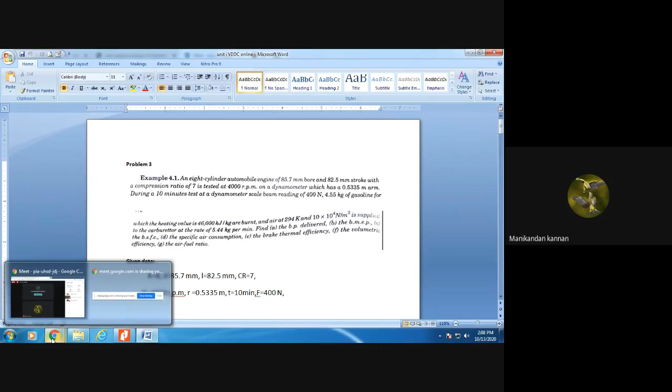So today, in the first unit, we are going to see the third problem. Yesterday we have seen two problems, today we are going to see the third. I will be reading out the question, then explaining you the given data, then you have to write and solve. Are you ready, Manikandan?

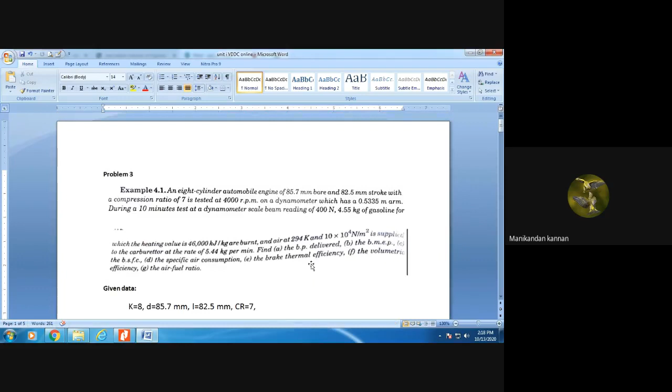Now all the data have been given. They are asking what? Brake power. So you have to find the brake power. The brake power formula, I taught last class: 2 pi NT by 60,000. 60,000 is for kilowatt.

So now what I'm going to do is, instead of N, I'm going to type the value. N is nothing but 4000 rpm. Engine torque - how to find the torque?

Another student joined. So N I am putting 4000.

For finding out the torque, we need force into radius. So what I am doing is, force is 400 multiplied by r. R is 0.5335. So you have to find the answer for this.

If someone is working, they may give the answer. Since you are traveling, you will not be able to do, I think. But next class, you give the answer. That is, without answer, we will see. Next class, I will be asking the answer from you, you have to tell.

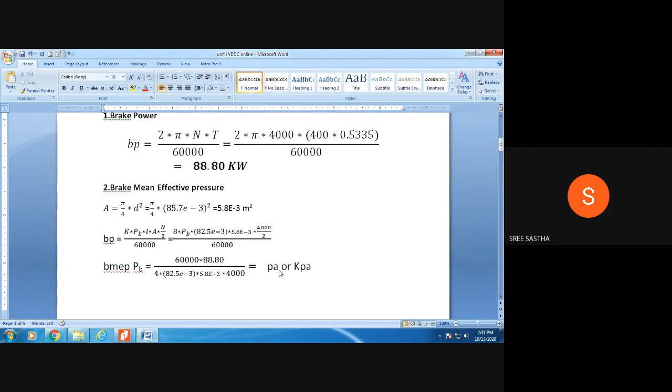Next is brake specific fuel consumption. BSFC means you first have to get the formula, and to get the formula you have to think about what it represents. As I told you last class, BSFC means how much fuel I am going to consume for the required power. B means I have to use brake power in the denominator. If it is I, I will be using indicated power in the denominator.

Here, my unit for WF will be in kilogram per minute. But what data am I having? He has given 10 minutes for conducting a test on the dynamometer. For 10 minutes, I am consuming 4.55 kg of fuel. So for 1 minute, how much fuel am I consuming? For 10 minutes it is 4.55, so for 1 minute divide this fuel quantity by 10. This gives 0.455 kg.

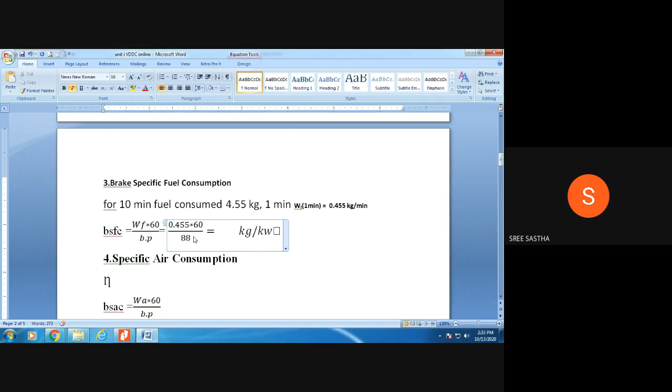I will be substituting 0.455 into 60, with brake power as 88. Whatever value you substitute, then you calculate. As I told yesterday, the value will come out in kilogram per kilowatt hour. You might have seen this last class — brake specific fuel consumption is measured in kilogram per kilowatt hour.

Why is H not coming? It's showing as a box. So here, brake power is in kilowatt, and my specific fuel consumption is in kilogram per minute. In order to convert that kilogram per minute, I multiply by 60 so it becomes kilogram per hour. Kilogram per hour divided by kilojoule per second gives a unit of kilogram per kilowatt hour.

Let me clarify here — yesterday this was unit one, and I mentioned kilogram per kilowatt hour. I have to use this 'brake' term because I'm using brake power now, so that the correct wording is given. So you have to use B — B stands for brake power. Now you find out this answer.

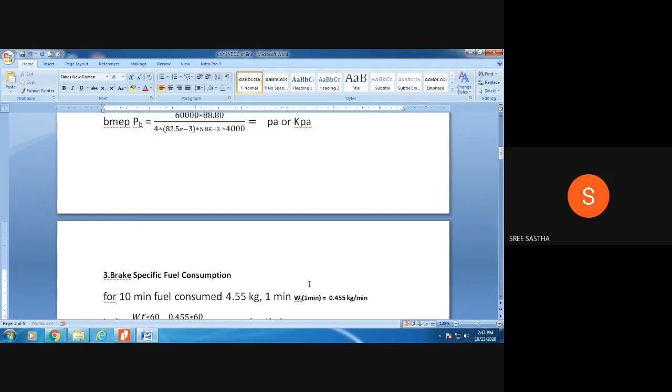So first parameter, brake power, we have calculated. Second, brake mean effective pressure, we have done. Third, brake specific fuel consumption, calculated using this formula: WF into 60 divided by BP, and WA into 60 divided by BP. So you have to work this out and give the answer.

Brake thermal efficiency — the fifth parameter is brake thermal efficiency. As I already told you, thermal efficiency always relates to how much fuel I am going to consume — that is, how much chemical energy I have, and for that chemical energy, how much energy I am producing. So brake thermal efficiency uses in the denominator how much fuel I consume and what the heating value is, then brake power is used. The 60 is there because I will be substituting the weight of fuel in kilogram per minute, so the units tally. Brake power you substitute as 88 kilowatt.

If its brake power is in kilowatt, calorific value should be in kilojoule. Whenever you have any doubt in the unit, substitute all the units, cancel them, and find at last what unit is coming. Here, kilowatt, kilojoule per kilogram. This kilogram and weight of the fuel in kilogram will get cancelled. Denominator has minute, I converted into second, so kilojoule per second becomes kilowatt. So numerator also kilowatt, denominator also kilowatt, so it will be cancelled and you'll be getting brake thermal efficiency.

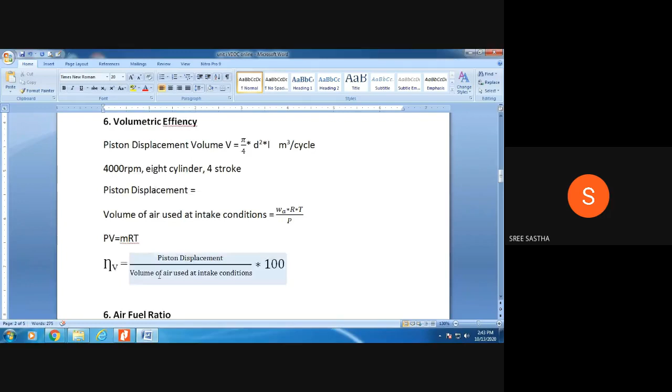Look directly at the formula for volumetric efficiency. Volumetric efficiency formula is piston displacement divided by volume of air used at intake condition, multiplied by 100. This is volumetric efficiency. So in order to find volumetric efficiency, you have to find piston displacement and volume of air used at intake condition.

Piston displacement volume - in IC engine you might have studied swept volume, Vs, piston displacement volume. I can use Vs or swept volume. Formula is pi by 4 d squared into L. D stands for bore diameter, L stands for stroke. So we will be getting this value.

So what you are going to do is, it is not just piston displacement, it is piston displacement volume. For piston displacement, I have to multiply this volume by how many cylinders, what stroke, and what is the speed. Then only you will be getting piston displacement, that is meter cube per minute you will get. I will explain how you are getting this.

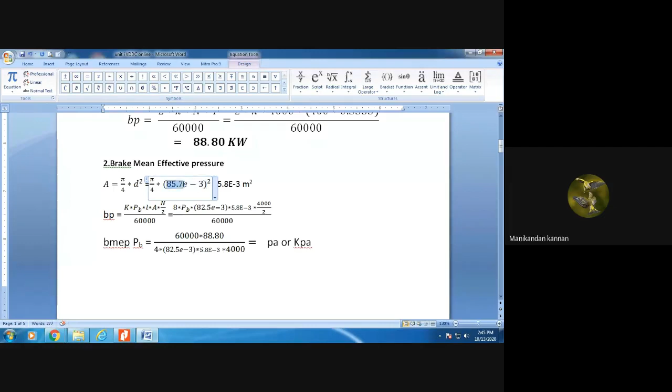The bore diameter is 85.7. Bore diameter 85 point something. So what I am doing here, the formula I have taken from the piston volume, you find out separately. Now it comes as 85.7 into 10 power minus 3, whole square, using the pi by 4 d square area formula.

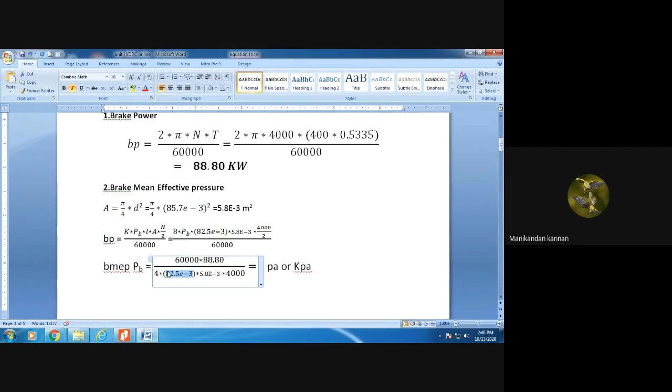Then multiply by L, you will get the volume, piston displacement volume. L is nothing but stroke. How much stroke? 82.5, so it is in mm, convert into meter. So pi by 4, 85.7 into 10 power minus 3 whole square, into 82.5 into 10 power minus 3. Don't get confused - you don't put square for stroke, you have to put square only for bore. So this one is piston displacement volume.

Now from this, how can I find piston displacement per minute? What I have to do is multiply this by speed, 4000 rpm, then multiply by how many cylinders, 8. Since it is a 4 stroke, divide by 2. Let me check.

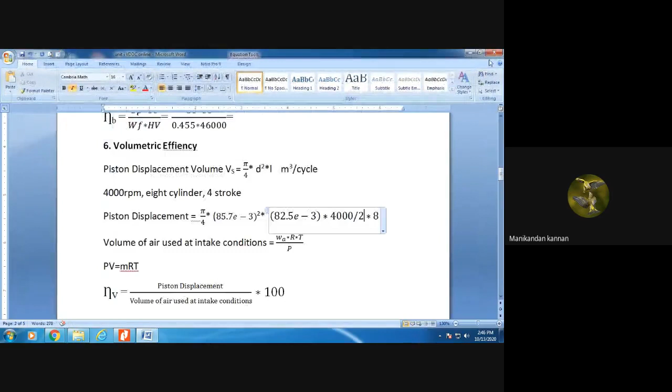Now I am going to give the values also, so that you can note down, because it has already been solved in the book. So you have to work it out without referring to the book or notes, and give the answer.

Okay, let us compare your answer. I'll write it from the first. So for brake power, see, force multiplied by radius: 400 into 0.5335. The answer it is giving is 89.

Later you can check. If it is not coming, write whatever answer you are getting. 89.34 kilo, or 88.80, whatever I found may be different, later you can check.

Now see, indicator pressure, that is brake mean effective pressure. I should not say indicator pressure, because I'm using brake power, I should say brake mean effective pressure. They are calculating the area separately. You should not get confused with why 10 power 6 is here, 10 power minus 3 is there - 10 power minus 6 coming to the denominator gives 10 power 6. So no need to see the problem-solving methodology in the book. This one is very simple and you will not make any mistake.

So brake mean effective pressure is given in kilopascal. Let me copy the value: 704 kilopascal. This is my second answer. First answer is brake power, second answer is brake mean effective pressure.

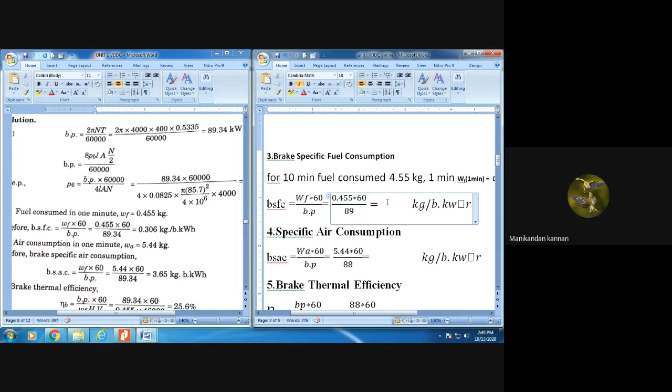Already you told the area. Later go home and check whether your brake mean effective pressure is approximately close to this area value, 700 something, 700 to 710, okay.

Sometimes the exact answer of the book will not come. So now see brake specific fuel consumption - same formula. It is coming around 0.306. I am not working it down fully; you have to work it out and use a calculator. I can't use a calculator because in the regular class itself we write the formula and tell you how to substitute - you have to calculate and give the answer.

So now I will share this file. What you have to do is work it out and check whether the answer is coming closer to this.

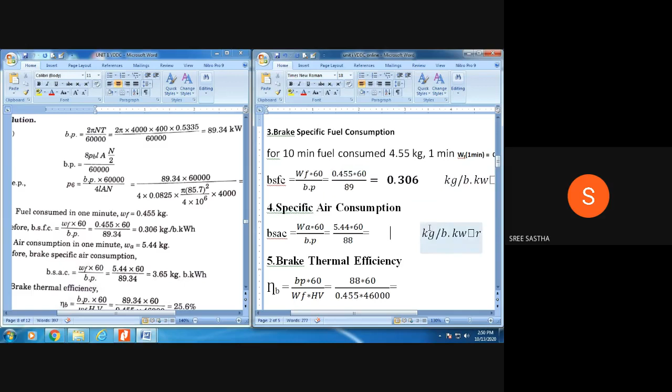Now see brake specific air consumption, same formula, but WA is directly given per minute - you can see here. WA is directly given per minute, so no need of any conversion. So it is coming to 3.65. This is the fourth answer, the fourth value he has asked.

Since no one is working it out, I am taking the answer from the book. Last class, Elaverson told the answer - 25 point 6, 0.256, okay.

So now see volumetric efficiency.

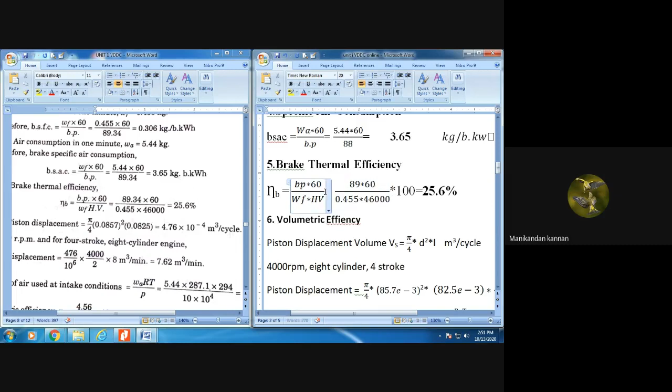It is understood as efficiency. By putting percentage, I have to multiply by 100, but I have to show it - I can't neglect it. Okay, good.

So now you have to find out the piston displacement volume, that is pi by 4 d squared L. It is coming in meter cube per cycle. I am explaining how much it is coming - 4.76.

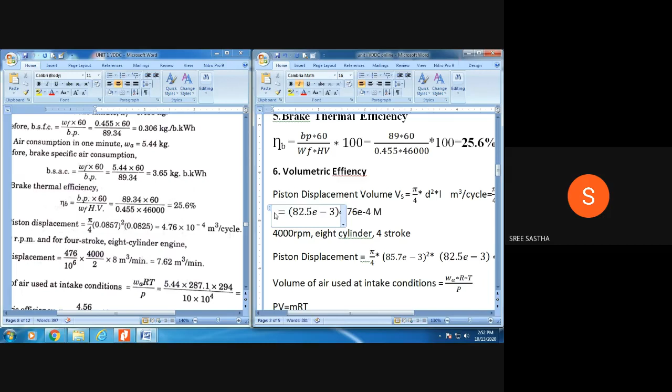Okay, copied. No. Hmm. So see,

This one L, sir, 4.75 into 10 to the power minus 4, sir. Pi by 4 d squared into L. Okay, this answer will not come. Whereas this one will be equal to... volume answer will be here equal to.

4.75 into 10 to the power minus 4. Okay, let me present it well. We will take this in the next line. Okay, this will be looking good.

D, I am putting 85.7, 10 power minus 3, multiplied by L. L is multiplied with 82.5 into 10 to the power minus 3. That you should not forget, okay?

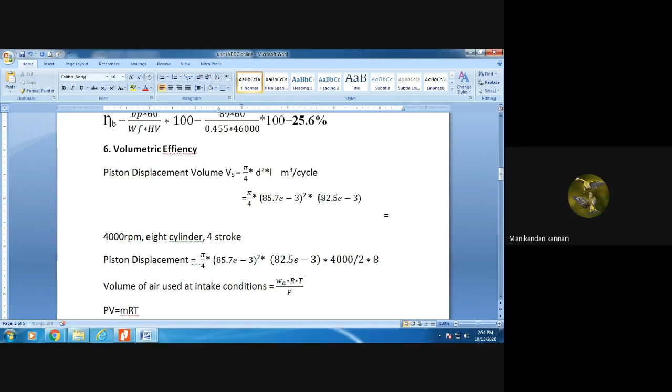Pi by 4 d squared into L. Square will come for bore only. So pi by 4, 85.7 into 10 power minus 3 square, multiplied by length. Length is nothing but a stroke, 82.5 into 10 power minus 3. The power minus 3 is because converting into meter. The unit will be meter cube per cycle.

So the answer I am getting is 4.75 into 10 to the power minus 4. Good.

Now I will explain this value. D unit is meter square, because you have converted mm into meter. L unit is meter, so meter square into meter gives meter cube. This is per cycle, not related to time.

For one cycle, my piston displacement volume is this much. Now I am going to find, for the entire operation of my engine, what is my piston displacement. So this is the formula: I have to multiply with the number of cylinders and stroke, four stroke.

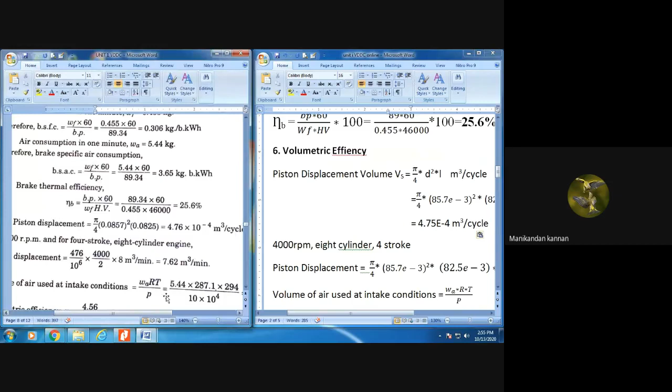No, I'm multiplying. See, so now I will simplify this. Instead of writing this much value, I will write directly my piston displacement. Now I think it will be comfortable for you to see.

See the formula. I have to multiply the piston displacement volume into number of cylinders, that is 8, and into 4 stroke. In order to avoid confusion, he is writing 10 power 6 in the denominator. If I am putting e power minus 4, I have to put a bracket, otherwise I will think it is 4.75 e minus 4. Here with the bracket, it is understood it is 10 power minus 4.

So it is the value for piston displacement, multiplied by number of cylinders, that is 8, and it is a 4 stroke engine. I am assuming it is a 4 stroke engine. So my n will be 4000 by 2.

What is the meaning of this? For 4 stroke, we are finding for a cycle. This one is for a cycle, and since it is a 4 stroke, we have to divide the speed by 2. For 4 stroke, number of power strokes, you have to find n by 2.

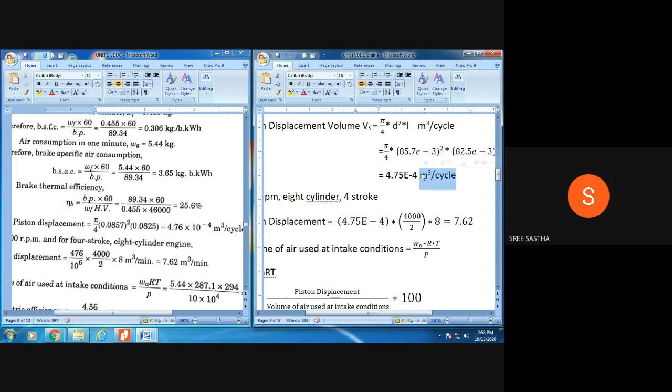So what I am going to do is this unit will be meter cube per minute. Now you no need to see this, just for seeing the answer only I have taken it. Unit should be always in small letters. Since it is equation, piston displacement is 7.62 meter cube per minute.

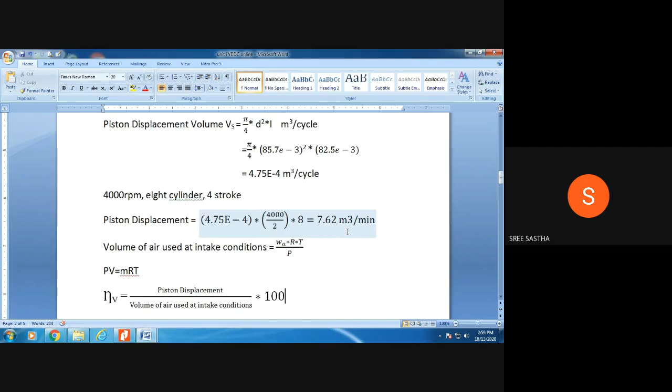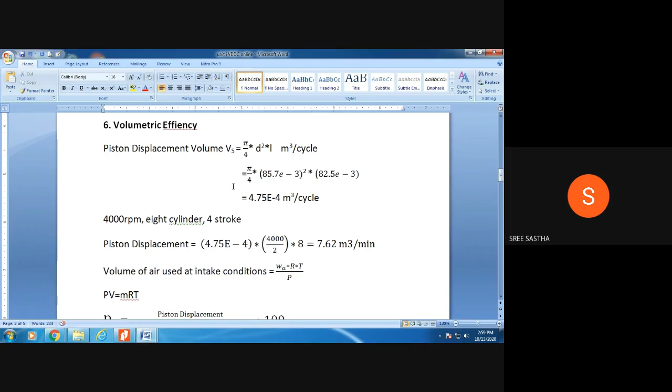Now I'm going to find volume of air. Why, you may ask, why we are doing like this? Because for finding out volumetric efficiency I need both terms: piston displacement, and volume of air used at inlet condition. This I have explained, the volume formula, multiplying it by speed and number of cylinders. Since it is 4 stroke, I am dividing the speed by 2. So that is the logic. Here I have to find volume of air.

You may ask how you are getting this formula. In thermodynamics, you might have studied PV equal to MRT, the ideal gas equation. For finding out V, what you will be doing? MRT divided by P, correct? V equal to MRT by P. The same formula only I am using here. You might be seeing, instead of M, I am using WA. So I am going to substitute this value.

WA is given how much per minute? 5.44.

R is a gas constant, you should know that: 287, or 0.287 kilojoule per kilogram Kelvin. So here I am putting 287. Then only the unit will be looking at tally. I will be explaining you how.

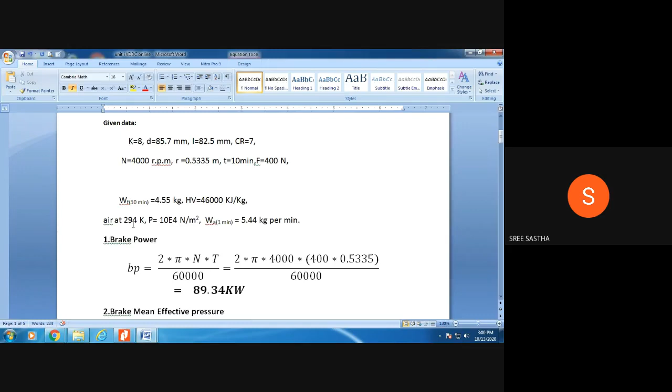What is the unit for temperature? What is the value? Unit is Kelvin, you have to refer 294 Kelvin. Everything, the data is given in the problem. Same problem will come, data will be changed - instead of 85 as a bore, they will be putting 90.

That's all. P is pressure, it is given what - 10 e power 4 Newton per meter square.

10 e power 4 is that kind of P. Now I will explain you, you will be getting one answer for this. Before that, 4.59.

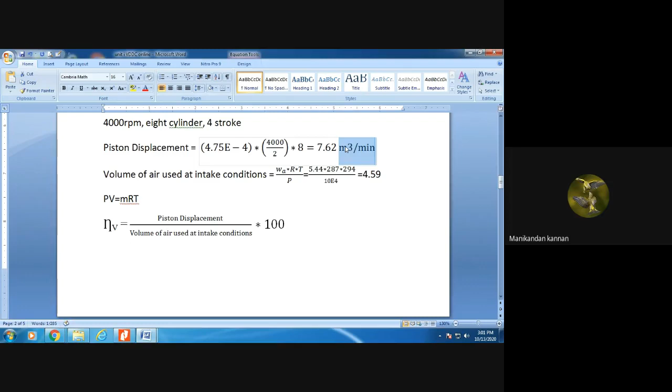4.59. This volume unit also will be meter cube per minute. Let me explain you why, how, by using this formula, how we are getting meter cube per minute. You see his answer - he's getting 4.56, you are getting 4.59, not an issue.

I'm going to explain you the unit. Denominator is pressure, unit is what? Newton per meter square.

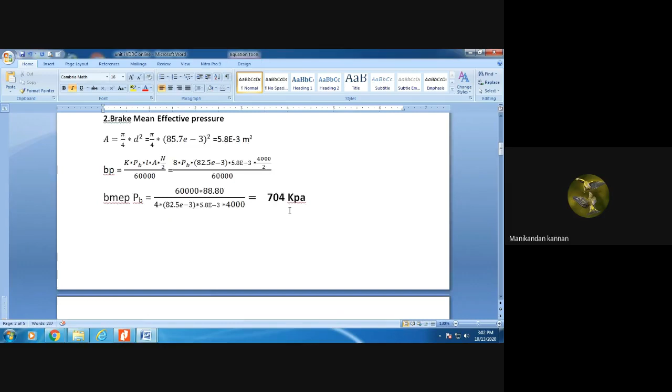The same quantity, if length is very very small, I will use the unit mm. Say for example a shaft diameter is 50 mm, I will say 50 mm. I will not say 50 into 10 power minus 3 meter, that is 0.05 meter.

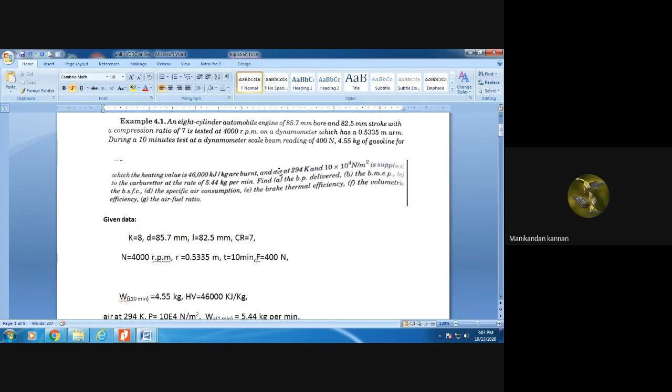So it's our conventional notation only. Most of the cases related to thermal side will be using pressure Newton per meter square. Let me explain you why we are using - it is given in the data itself as Newton per meter square.

Now see WA, you know the unit. I am just cancelling and typing the unit. WA is kilogram per minute. This minute only is going to come here.

What about gas constant value? 287, you should not use 0.287, then it will be kilojoule. So see, it is 287, so joule per kilogram Kelvin. That is very, very important.

Joule per kilogram into Kelvin. What I will do is joule per kilogram. Not kilogram - because it is a specific heat, similar to specific heat, joule per kilogram per Kelvin. Normally we will be using kilojoule.

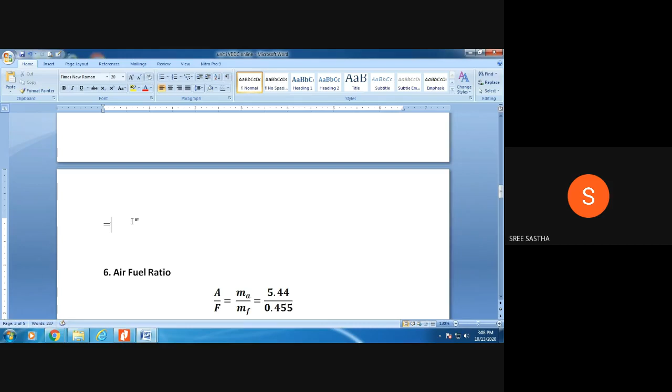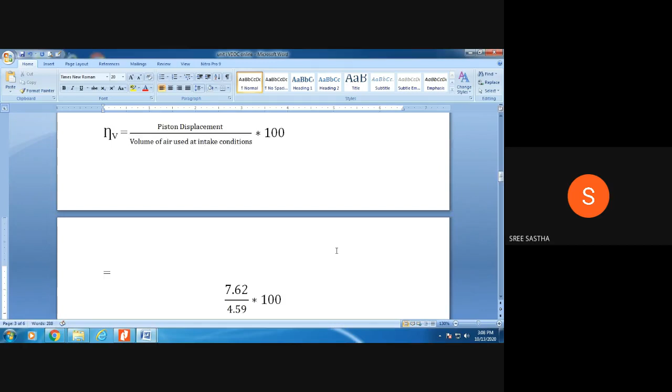Okay, I'm typing here. What is piston displacement? 7.62 meter cube per minute. Volume of air is 4.59. So you have to understand the formula: volumetric efficiency is equal to piston displacement divided by volume of air used at intake condition. 7.62 meter cube per minute divided by 4.59 meter cube per minute. Okay, so find out the volumetric efficiency.

The same formula, same method can be adapted for all the problems. Okay, you are substituting this value. You are able to find now volumetric efficiency. How much?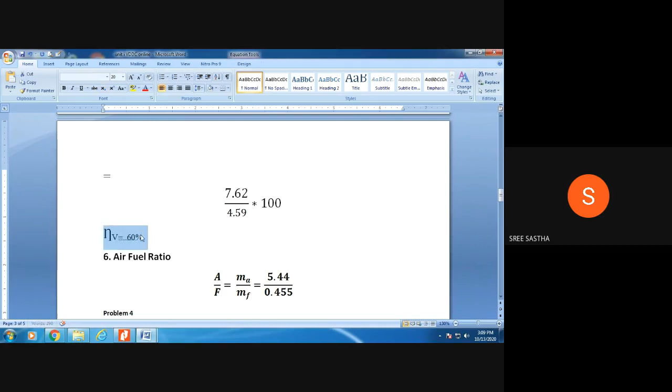60, you are getting or not? Check. This is one answer, my volumetric efficiency is 60%. Okay, so see, first one brake power.

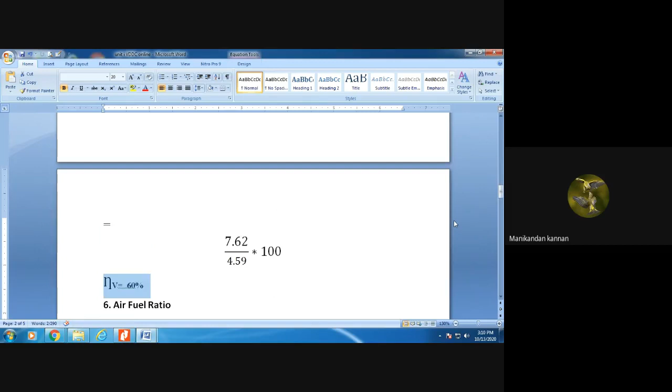Always volume of air, piston displacement, volume of air. Let me check, 60.23%, wait. Volume of air is... so volume of air will be coming in numerator, correct? Yes sir, so I have typed it wrongly.

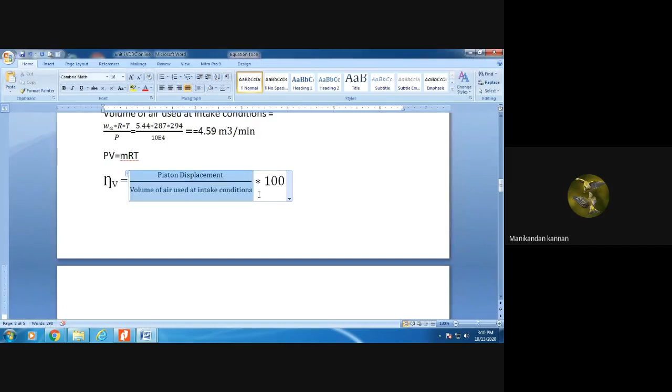Okay, always volumetric efficiency, piston volume only will be coming down. Mistakenly, I have typed wrongly, so please correct it, don't repeat this mistake. It is 60.23%, previous mistake. Okay, you should not change the numerator and denominator, let me correct.

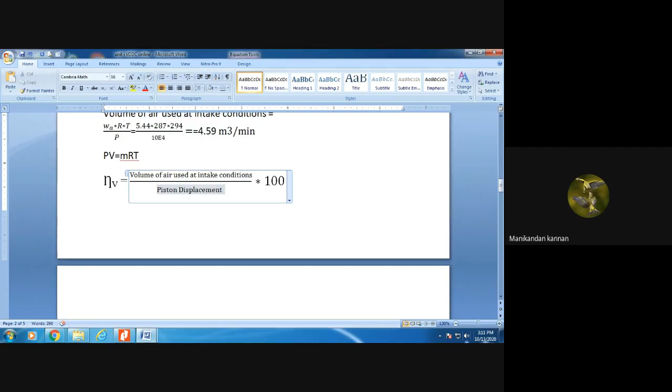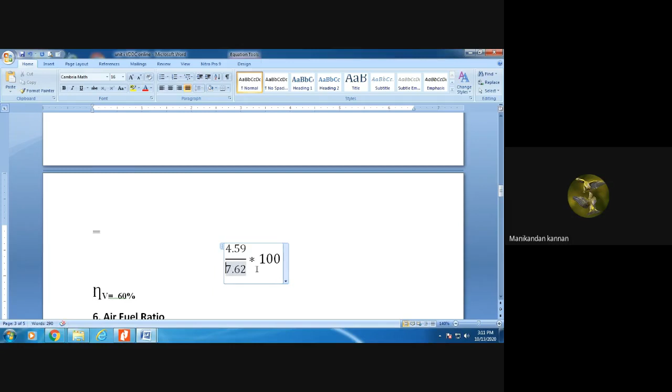So volumetric efficiency formula, again you correct it. It is volume of air used at intake condition divided by piston displacement. Okay, so 4.59 divided by 7.62, check whether you are getting 60. Good, 60.23%. You are getting 60. We will proceed to the last topic, air fuel ratio.

Sir, getting the answer 60%. 60.23%. Okay, no problem. Now, the last one is air fuel ratio. Air fuel ratio is mass of air divided by mass of fuel. You remember this term, air fuel ratio, either on mass basis or either on volume basis.

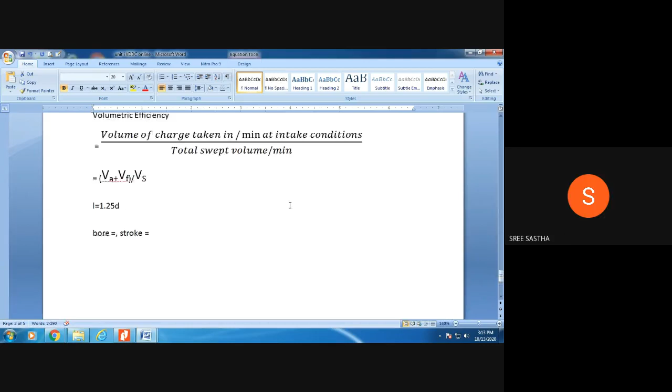We will be able to complete, not an issue, because we are having half an hour, no? So we will be able to complete.

By today, I am completing the first unit and I will be sending the formula through WhatsApp, tomorrow or before the next VDDC class. Okay.

Okay, now sir, see air fuel ratio, mass of air divided by mass of fuel. Either it can be on mass basis or it can be on volume basis. Okay, air, if I'm saying A by F, mass of air should come on numerator and F, mass of fuel, should come in the denominator. If I'm saying F by A, mass of fuel should come on the numerator and A should be coming on the denominator. So you try to find out what is the air fuel ratio. 11.95. 11, huh? 11.95. Okay, good.

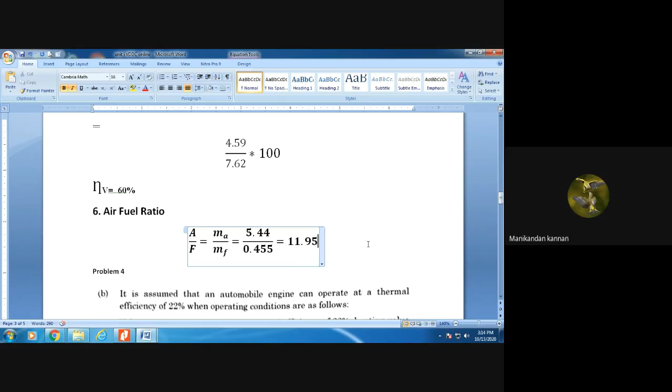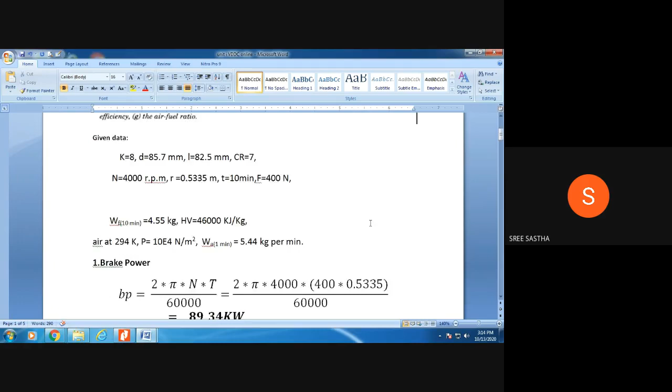11.96. So see, this is a very lengthy problem, and it involves calculation of most of the parameters. When you are able to solve this problem, any model related to this, only the values will be changing, but the concept will be simple.

Okay, for example, see air fuel ratio is given mass of air and mass of fuel. If mass of air is not given, you can't find volumetric efficiency and air fuel ratio. So they will ask up to brake thermal efficiency, they will not ask volumetric efficiency as well as air fuel ratio. If WA is not given, volumetric efficiency and air fuel ratio we can't find, so the problem will be simplified. But this problem includes all the values, so it's complicated, that is a lengthy problem, and if you're able to solve this, you'll be able to solve all the types.

See how many parameters he has asked: brake power, brake mean effective pressure, brake specific fuel consumption, specific air consumption, brake thermal efficiency, volumetric efficiency, air fuel ratio.

It didn't ask about indicated power. Why not? Because mechanical efficiency is not given. If mechanical efficiency is given, we can find out indicated power also.

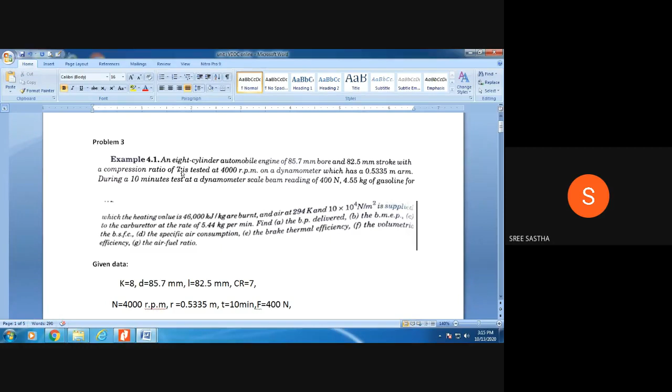See, I am not using this value. Compression ratio is 7. I am not using it. So you go through this problem.

Brake power - we have found out brake mean effective pressure, very easy. Brake specific fuel consumption - these are the formulas. What you have to do?

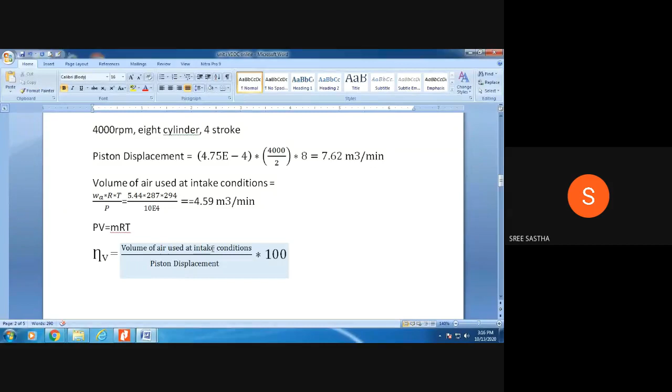You have to take this formula separately and learn specific air consumption, brake thermal efficiency, and volumetric efficiency. You correct my mistake - initially I typed it wrongly. It is volume of air used at intake condition divided by piston displacement. And also air fuel ratio.

So this is one of the most important problems. Shall we proceed to the next problem? Manigandan, shall we proceed to the next problem? Yes sir. Okay, it will be simple only.

Just I will be explaining you the step. So it is assumed that an automobile engine can operate at thermal efficiency of 22 percentage. So it is given - my automobile engine thermal efficiency.

So immediately I'm writing the given data. By reading one sentence, you write the given data. Efficiency thermal 22, operating condition given. Volumetric efficiency 80, mechanical efficiency 82.

Heating value of petrol - heating value of petrol is 46,400 kilojoule per kilogram, HV. Calorific value - calorific value, both are same.

Then see, now he is giving one statement, not to confuse you. Already you know for burning 1 kg of fuel we require 14.5 kilogram of air. But he is saying the same thing what we already know, given in the problem. Theoretical air required per kg - that is on theoretical basis, not on practical.

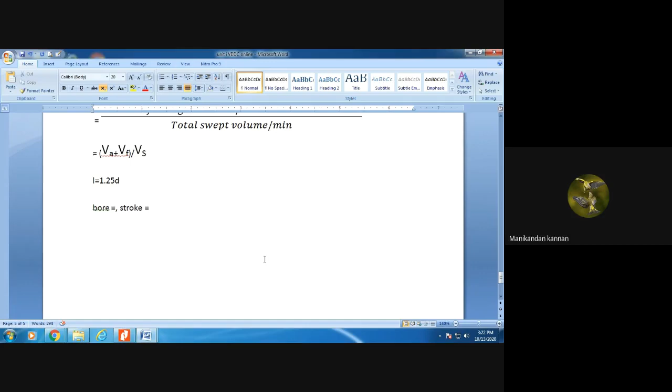Bore and stroke can be found when we know volumetric efficiency, because in volumetric efficiency we have the formula pi by 4 d squared L. So you will be able to find either D or L, because the relationship between L and D is given. So you have to find volumetric efficiency first, and from that find D and L.

For finding volumetric efficiency, there is another formula, instead of using this: VA plus VF divided by VS. For this VA and VF, we are calculating this. Actually, the volumetric efficiency is given. If the volumetric efficiency is not given, you will not be able to proceed with this problem.

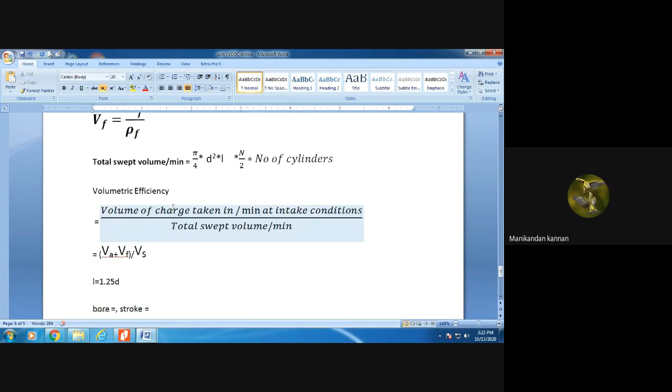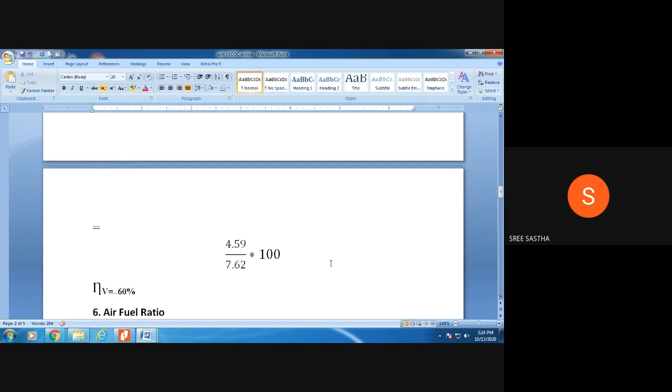So at last, this logic should come into picture. For finding out D and L, volumetric efficiency is given. So what you have to do is, in the numerator, we have found out, like in the last problem, the volume of air used at intake condition. Using this volume of air used at intake condition - in the last problem only air was used, but here we are using both air and fuel.

Let me explain. So now, in order to proceed with that logic, you have to calculate how much quantity of fuel I am going to supply. It is not given in the problem, but we know the thermal efficiency and calorific value. So immediately in your mind - first, mechanical efficiency is given, so you have to think, with the mechanical efficiency and this data, what can I find.

I am having brake power, I am having mechanical efficiency, so with this I can calculate indicated power. I have calculated my indicated power, it will be used somewhere, but you calculate it first. Later you will realize where we will use indicated power. Next, thermal efficiency is given. With this thermal efficiency, what can I do - you will get the idea.

Thermal efficiency - I know one formula, ip into 60 by wf into hv. I have found ip using mechanical efficiency. I can find my wf, because when wf is there, I can use it in my volumetric efficiency to find out bore and stroke. Like this you have to think.

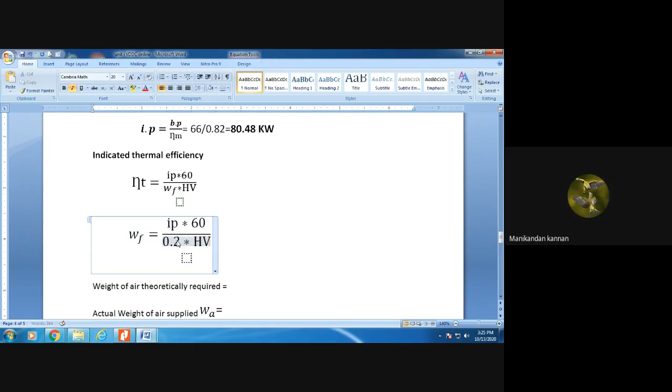So for finding out WF, we are going for indicated thermal efficiency. Indicated thermal efficiency is given - how much? 22 percent. So you put 0.22. Calorific value - how much? 46.

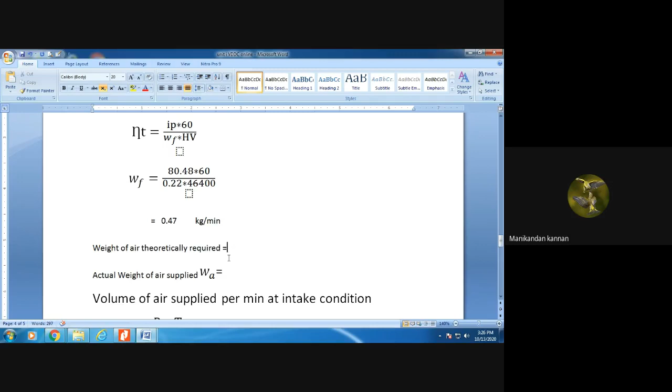0.47. Now you know that the air theoretically required is 15, sorry, 14.7. Even though it is not given, you should be knowing it - stoichiometric ratio. It is given as 14.5, so I am putting 14.5.

Actual weight of air supplied, WA, will be 14 point... tell me. 25% more, no? So you have twenty-five percent more than the theoretical. Let me check the answer.

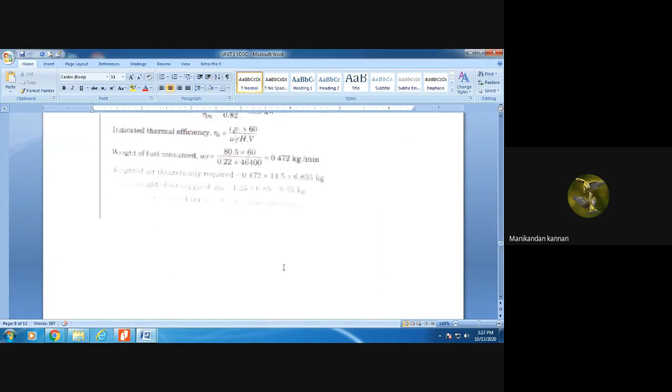Indicated power is coming 80. Very good, your answer is good. Weight of the fuel is 0.47 kilogram per minute.

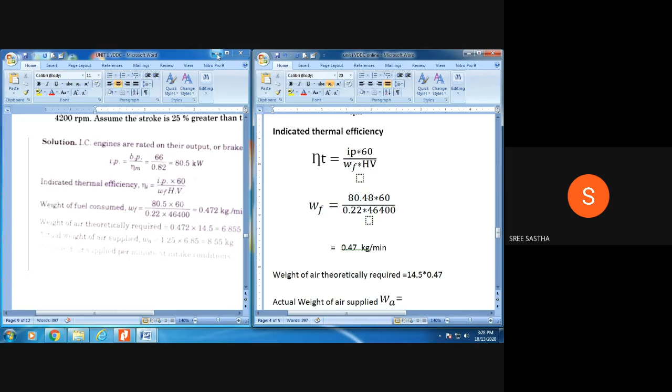Now theoretically, air fuel ratio is 14.5 multiplied by 0.47. I will explain this. This problem is somewhat tricky, so listen carefully, I will be including another step here.

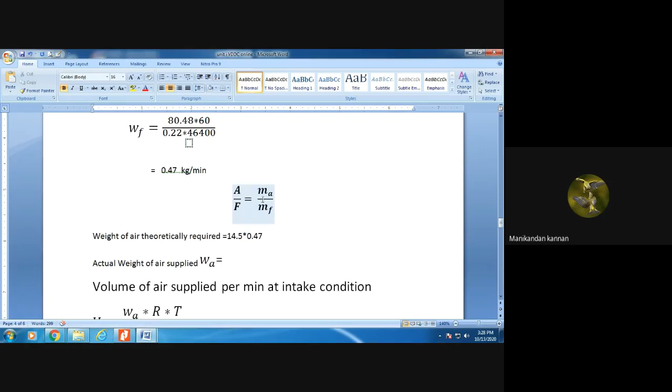Air fuel ratio is mass of air to mass of fuel, which is 14.5. Instead of M, I can write W also: WA by WF. This you have to know, either on mass basis, but here kilogram per minute, so this data also I can use.

Understand the logic clearly. Directly I can't find weight of air, but air fuel ratio is given as 14.5. That is for correlating the data: for 1 kg of fuel burning, I need 14.5 kg of air. So fuel is 1 kg, air is 14.5. For us, how much fuel is it coming? 0.47.

So 0.47 is the fuel amount. Now how to find the weight of air? 14.5 into 0.47 equals 6.81. Even though I'm using weight of air, don't get confused, unit will not be in Newton, it is kilogram per minute, that is from the VDDC point of view.

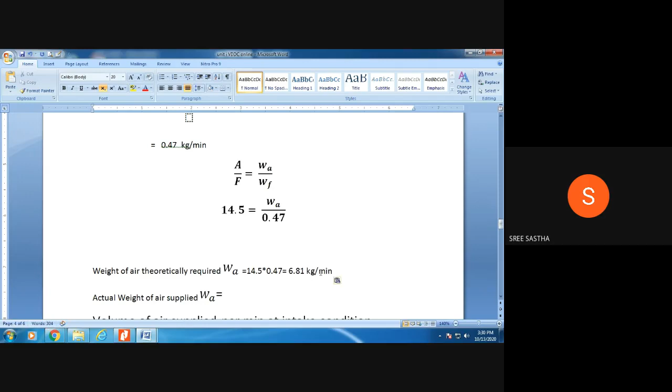This is the theoretical air required based on air fuel ratio, but we are supplying some excess air, 25% more. So what I will do is multiply this by 1.25, otherwise I will find out 25% and add it with this.

So you are getting 6.81, multiply this by 1.25 because I am supplying 25% more. This is very very important: how to put the 1.25. If I am saying 30% more, you will put 1.3.

Try to find out: 8.51. Unit will be same, kilogram per minute. Now I know what is the weight of air.

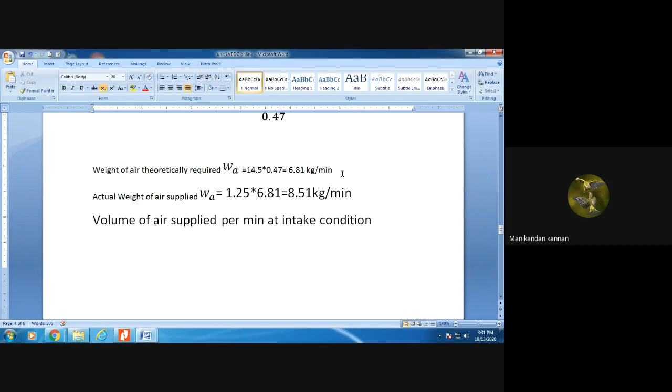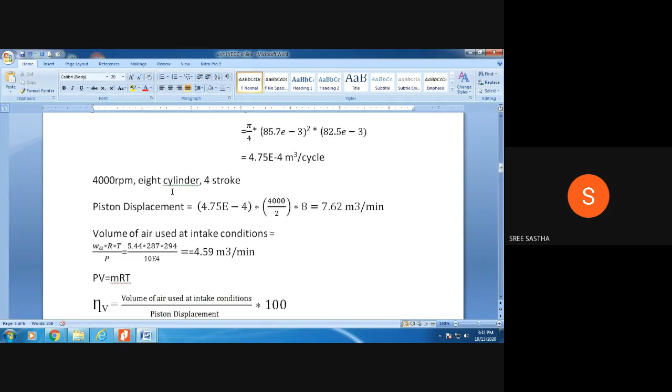This is the same formula as before we have used to find out volume: PV equals MRT. Volume of air I am going to find, then I will be finding volume of fuel also. So I will be substituting now.

WA is 8.51, R is 287, temperature given is 333 Kelvin. All this data is related to air; if this data is not available, we can't find volume of air. So this data is given, at the end of suction we need it, so it is given as 8.24 into 10 to the power 4.

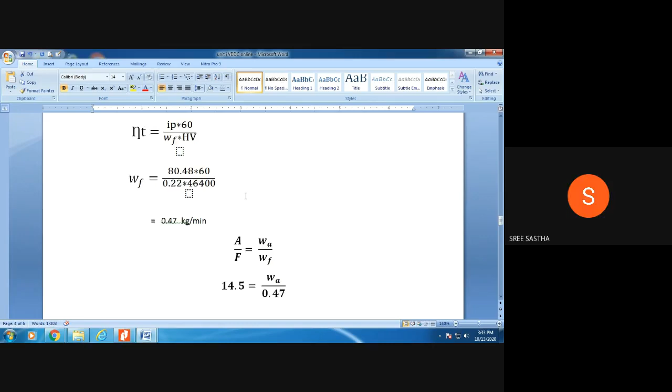Now you find density of air, then it is given density of our fuel, that is petrol vapor, will be 2 times the density of air. Let me explain, then you proceed.

So from this formula: volume of air, this is volume, density of air. Let me explain you, okay. What I have to do is density equals mass by volume.

Let me check, 9.94. You are getting meter cube per minute, it is a meter cube. Now what I have to do is...

I need to find VA similarly. I have found VA. Okay sir, understand, 9 points sir. I have written 9 points. Good.

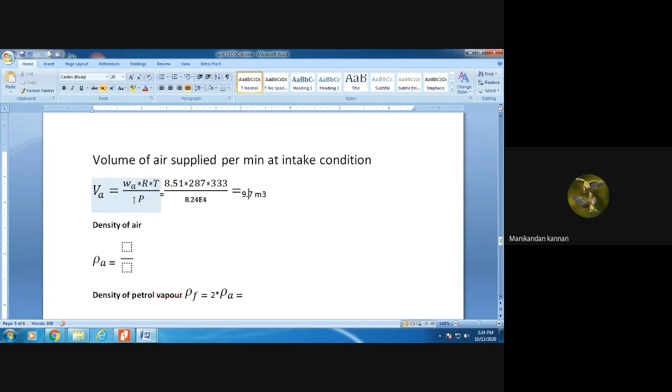I have found out VA. Now similarly I have to find VF. For this, I am not bothering about density of air, but for finding out VF I need some values. For fuel I don't have this data, so I have to find it in another way. For that I'm using the term density equals mass per volume. When mass of the fuel is known and density of the fuel is also known, I'll be able to find volume of the fuel. So the same logic only I'm going to use.

So it is like a twisted problem. For that, he has given one hint: density of the fuel is equal to 2 times the density of air. Since the data is given, I'm finding the density of air. Density of air is mass per unit volume. Here the mass is 8.51, mass divided by volume, that is kilogram per meter cube will come. So find out this answer.

What is density of air? The unit will be 0.877, 0.8777 kilogram per meter cube. Okay.

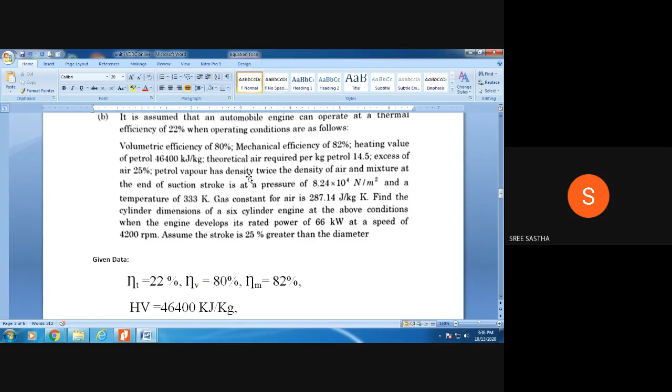Now, density of petrol vapor, what you have to do? You have to multiply this by 2, because it is given in the problem. Go and see, 1.75. It is given: petrol vapor has density twice that of the density of air.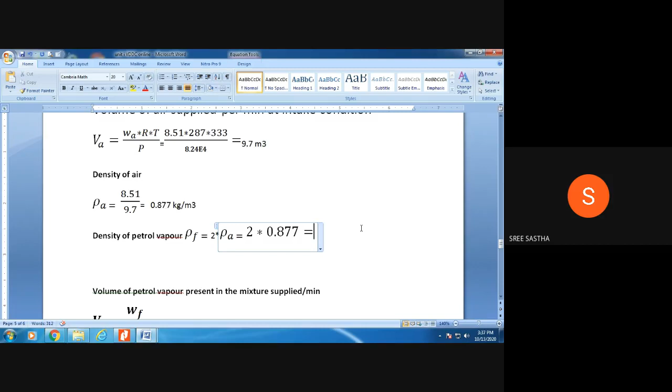First of all, it is given rho of F is equal to 2 into rho of A. So I found rho of A, density of air, and from that I'm going to find density of fuel. The answer is 2 into 0.877 equals 1.75 kilogram per meter cube.

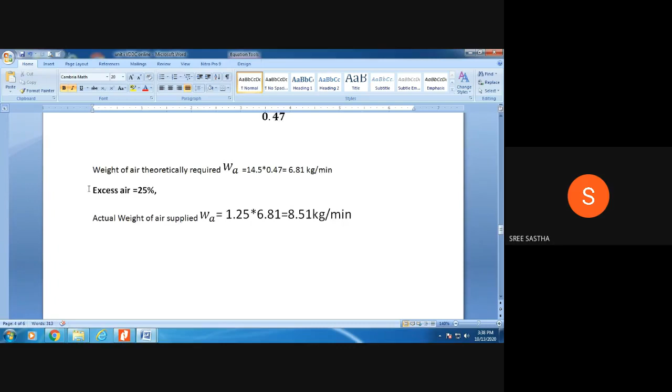0.26, yes, 0.26. Then volume, unit will be meter cube. Let me check, 0.26 sir, not 66, it's 26. Let me check the value.

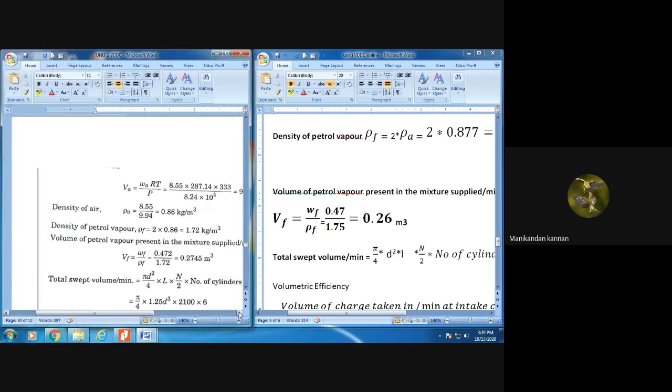Okay, it is correct. Now I will explain you how to do this. You are going to find this part now; the entire part I will explain you, I will give time, you find out. See, the last problem we found out what is piston displacement volume. First of all, I will explain you.

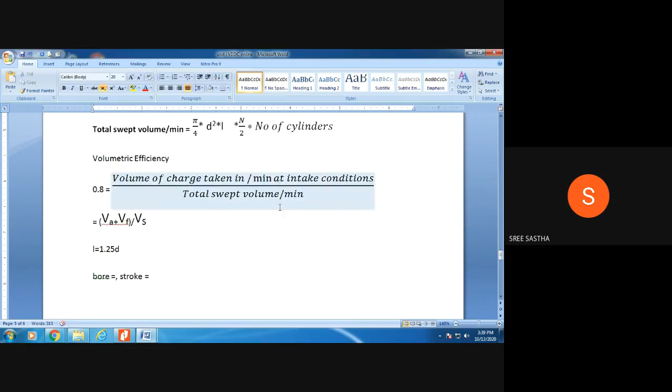Volumetric efficiency equals volume of air used at inlet condition by piston displacement. So based on volumetric efficiency only, I am going to proceed with this problem. You take this volume; volumetric efficiency is given as 80%.

Okay, volumetric efficiency given 80%, that is 0.8. Total swept volume per minute, that is piston displacement volume. Formula is, as in the last problem itself I have told you: pi by 4 d squared L into n by 2, number of cylinder. Instead of number of cylinder, I can put K.

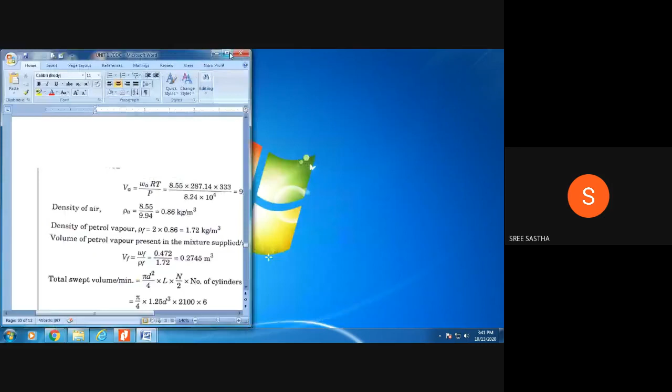I am not going to show this because of time constraint, I will show here. See, what he is doing: pi by 4 d squared L into n by 2, number of cylinders. Number of cylinders is 6, n by 2 is 2100.

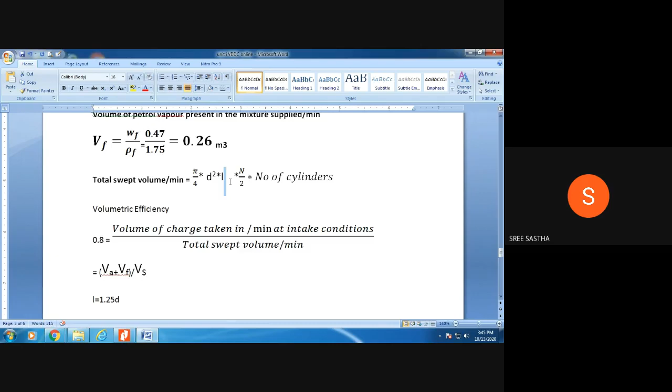Stroke is 1.25 times D, is 25% greater than diameter. That is, my L is 1.25 D. Okay? So write down the answer.